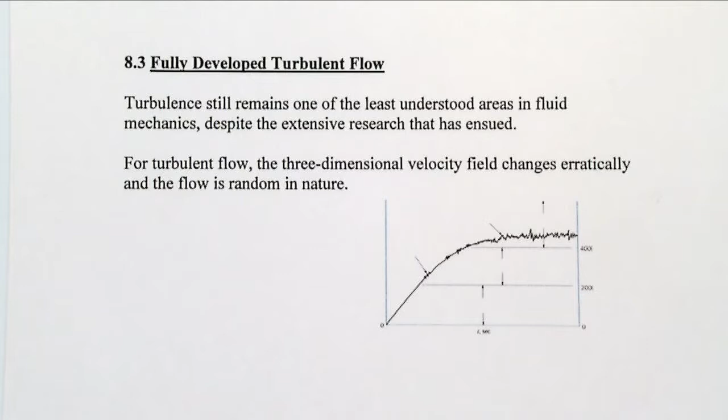We talked about the minor loss, major loss in the fully developed turbulent flow when you have a turbulent flow in the pipe. Turbulence is still a question for science. There are many different papers and books about turbulence, but turbulence by itself is a chaos, and it's not understandable how the flow is going to move because it's random. But if you take an average, or somehow theoretically solve that, there is still no exact solution for turbulent flow. This is still the least understood area in fluid mechanics, especially in the pipe.

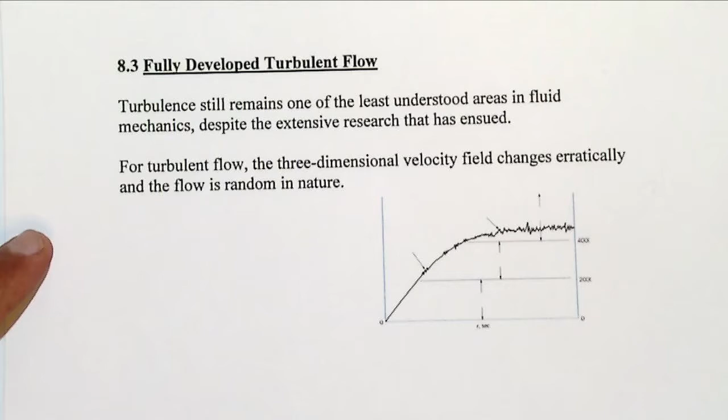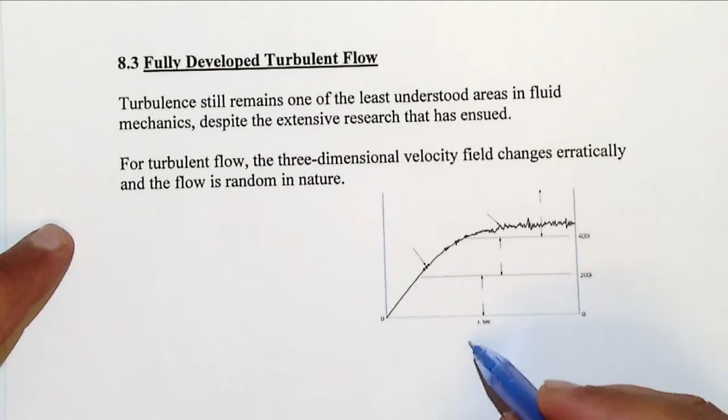So we talk about the critical Reynolds number: after 2000 or 2100, you will have a transition that starts a transitional period, and then you have fully turbulent flow. If you plot time in seconds here, and Reynolds number here, at 2000, 4000, and here is your velocity profile in the pipe. At first, when the Reynolds number is less than 2000, you have laminar flow.

After that you have a transitional period, and after that you have fully developed turbulent flow. These are the velocity profiles, and you see you have a noisy profile. That's because the velocity is not smooth, and the velocity is going to change.

But there are some advantages and disadvantages with turbulent flow. At first, you have to know that if the velocity is in the laminar part, it's one dimensional, so you only have u in the x direction, as we talked about in the previous class. In laminar flow you have that velocity, but after that you have some wakes or something like vortex. So it has to be known that you have a u velocity, but at the same time you have v and w, so it's going to be random motion.

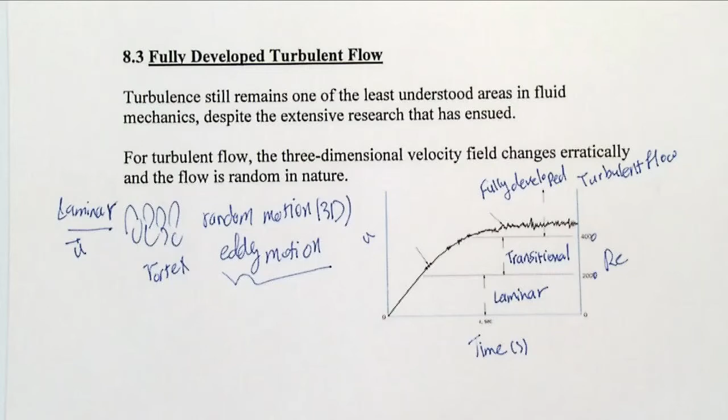So what will happen when you have a vortex or eddy motion? One of the main things that happens is the mixing is going to be high, so the flow layers are going to be mixed with each other. So if you put one particle of the fluid and track it, it's going to have a chaotic or random movement from layer to layer. It's not going to be smooth like laminar flow.

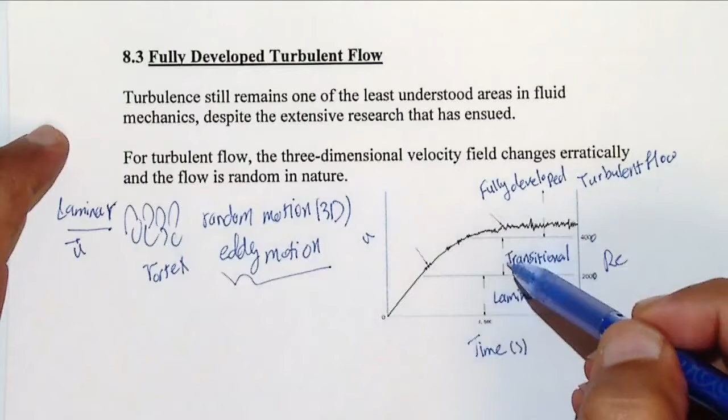And since you have a vortex, the size of the vortex or wakes at first is going to be high, like in the transitional stage, and then after that you will have very small noises because the size of the vortex or eddies is going to be smaller and smaller. It's going to be a very small size of vortex that finally dissipates your energy.

So it's another source of loss of energy in the pipe. In laminar flow you have a viscous effect, and you find out what is the loss. But here in turbulent flow, you have another loss because of the turbulence. That's the difference: in turbulence, by the layers affecting each other with random motion and vortex, you will have a dissipation of energy because of the turbulence.

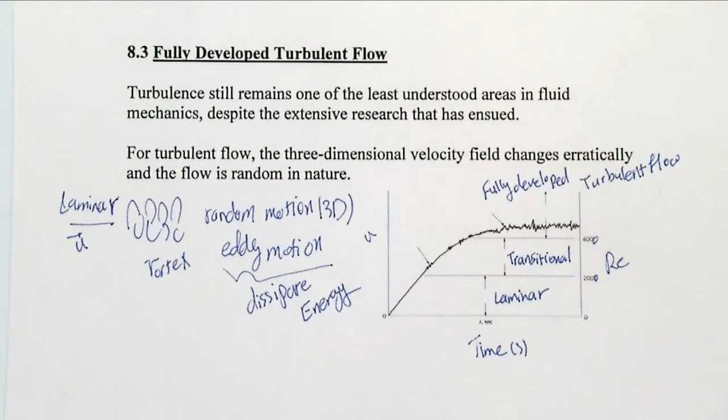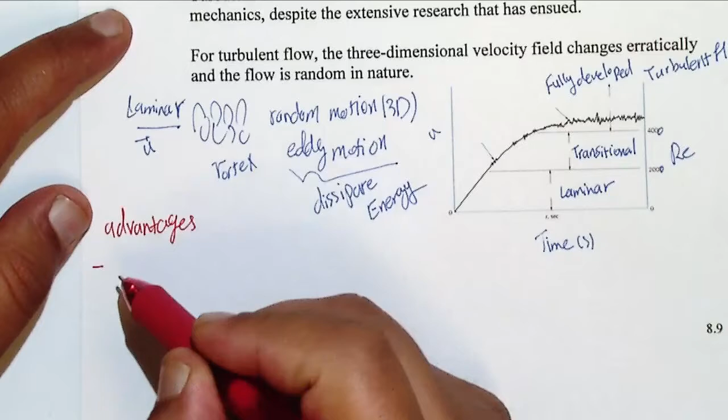So if I write it down just for your information, turbulence is not always bad. It has advantages and disadvantages. So, advantages: it could be enhanced mixing. Sometimes you need to mix, that's why when you mix your coffee with cream, you need to make a vortex there, and chaos, also turbulent flow, because that's going to increase your mixing. By itself, laminar movement is smooth, and mixing is very slow.

So enhanced mixing is going to improve your heat transfer. It's not always bad, but it has disadvantages as well.

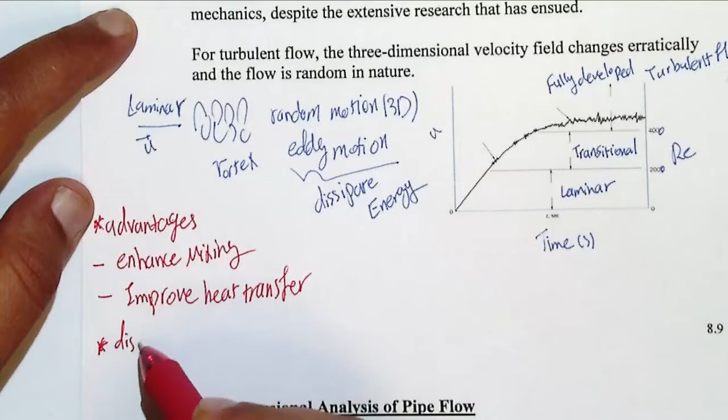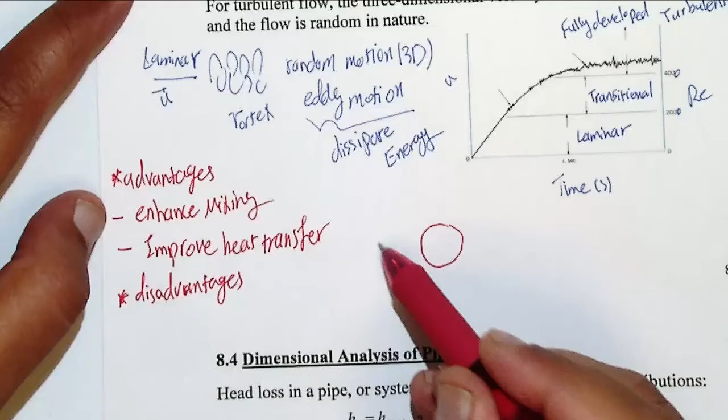Disadvantages: it could be the drag force. So for example, you have a ball and the flow comes in and goes over it, and here you have a wake. Because of the wake behind that, there is turbulence flow, and the drag over that is going to be increased.

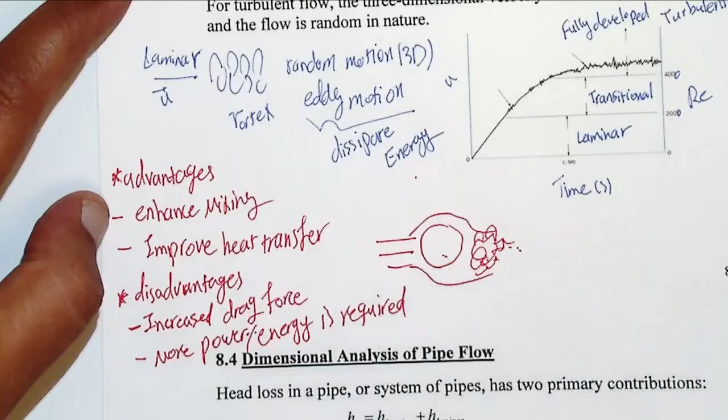So increasing the drag is a bad thing that you have to know about turbulent flow. What else? The amount of energy required also increases. Why? Because you have dissipation of energy, right? More power or energy is required.

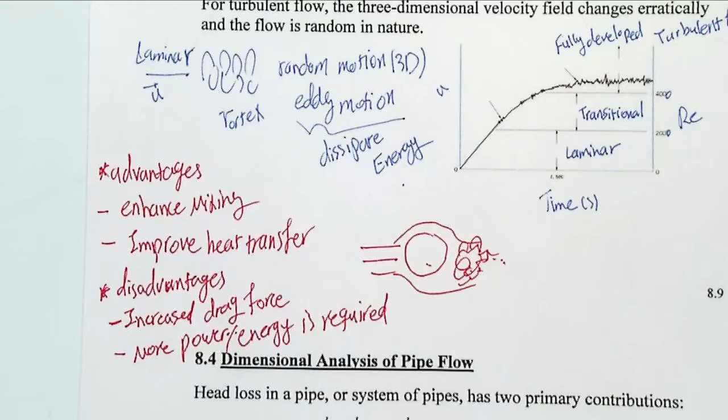These are the advantages and disadvantages in turbulent flow, and you have to know that mixing and improving heat transfer happen because of eddy motion. Increasing the drag by itself is just based on experiment, because of the wakes that we have, and also power and energy because you have dissipation of energy.

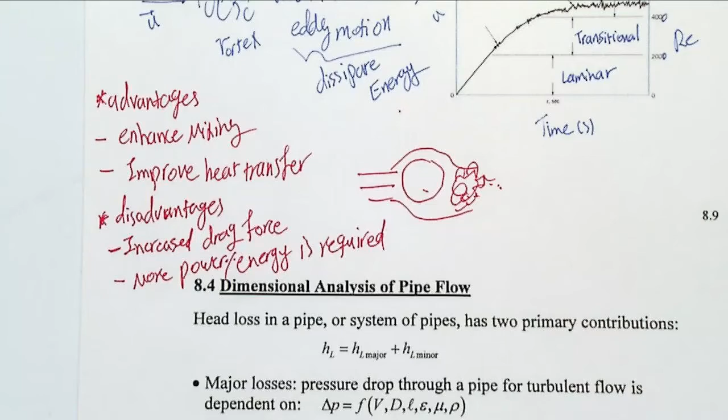Okay, what we are going to do here is find head loss in this pipe. So for now you had another equation, 64 over Reynolds for friction factor, that we talked about in the previous class, and it was the friction factor we found, times L over D, V squared over 2G. That would be your loss here, and if that's laminar, it's going to be 64 over Reynolds. So you did that and found it for laminar flow.

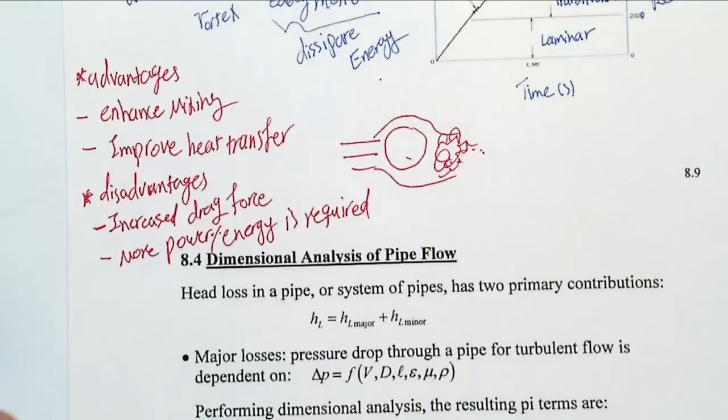But now it's turbulent flow, so you cannot use that equation because that's for laminar, and now we have turbulent flow. So at first we make changes in the head loss and make it two terms, which are the major and minor losses.

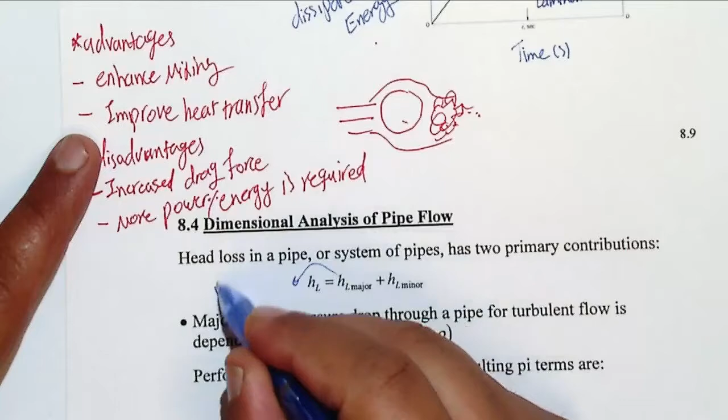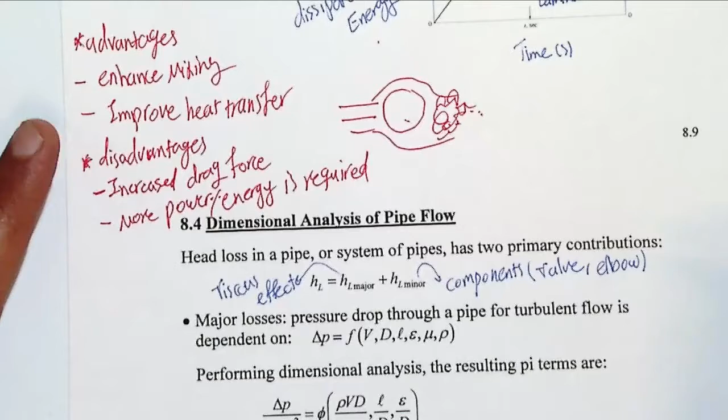We separate those because major loss is because of a viscous effect; that's the major loss. Minor loss is because of components, configuration, and also the direction. So it means that if you have any valve or any elbow, if that's not a straight pipe, then you will have a minor loss because of those, right? So you have a major loss that is viscous effect.

Again, this viscous effect is not the same as the viscous effect you have in laminar flow. You will have a different viscous effect here, but it's the same as the definition you have in laminar flow. So it's going to be the major loss that is for straight pipe.

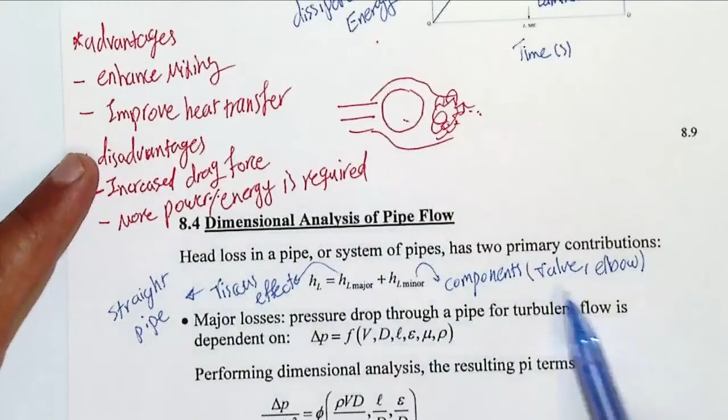But if you have anything like a valve or elbow or anything that additionally decreases your energy or loses your energy, this is going to be another term that is going to be calculated.

Okay, so we did that dimensional analysis in laminar flow. If you check the notes and the previous video, we wrote down the parameters that delta P, or pressure drop, is dependent on. This was velocity, the diameter, the length, and also mu.

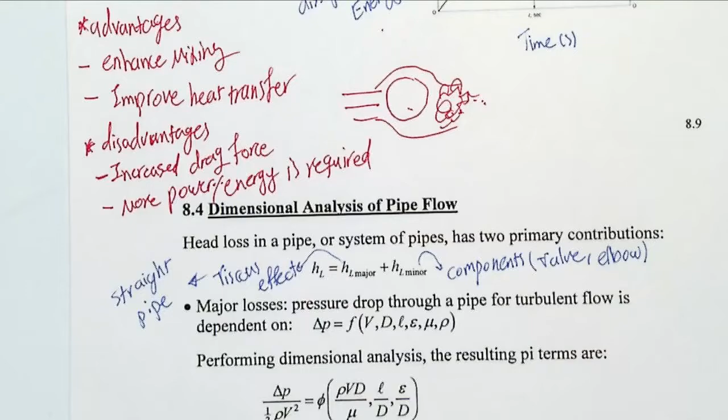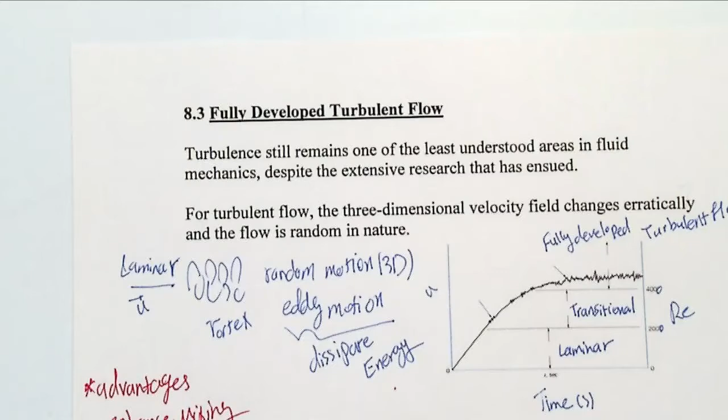But the difference is that in turbulence, two additional terms should be added. In turbulent flow, the density... because you have eddy motion, you have inertia or the mass of the fluid, and density is another parameter that contributes to the loss and energy loss or pressure drop that you have.

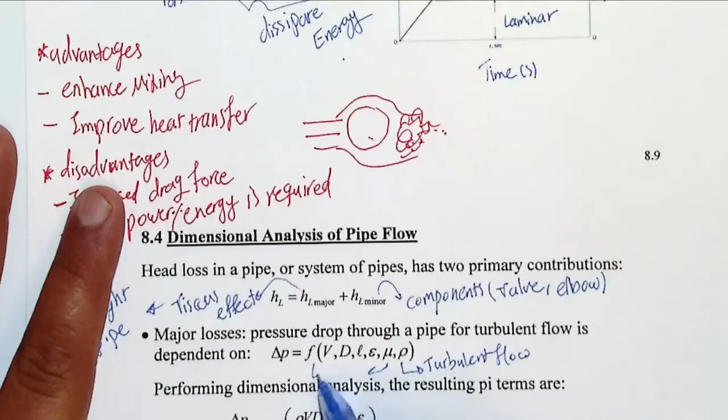So we have added two additional parameters here. One is rho, because of the turbulent flow, but mu was there before because of laminar flow. So the difference is that epsilon and rho are two additional parameters that delta P, or pressure drop, is dependent on.

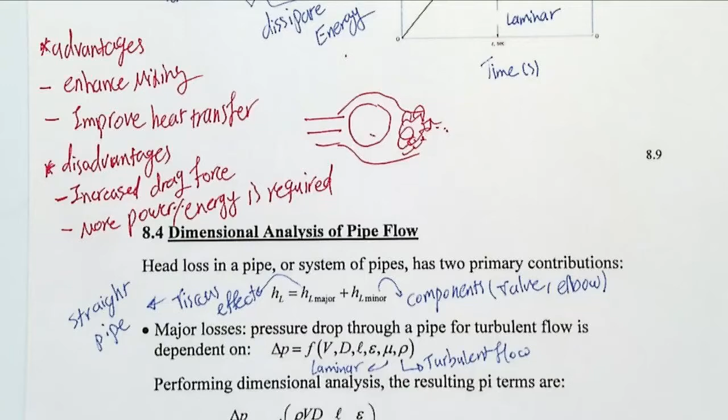So if you write it as tau, because you are talking about major loss, right? Tau is not just minus mu du over dy - that was for laminar. Here in turbulent flow, you have tau, which is tau laminar, plus another tau, which is for turbulent.

It means you have the same major loss that you have for laminar flow, but additionally, because of the chaos that you have, laminar plus another additional tau between the layers is also part of the pressure drop.

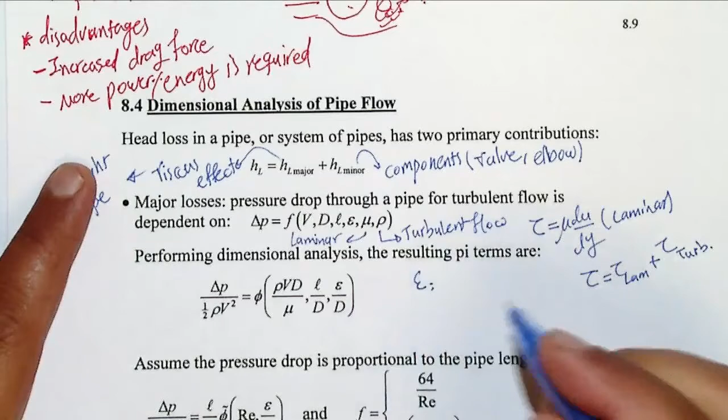So we'll list the parameters as V, d, mu, and L that we had before - 5 parameters. Additionally, 2 parameters, which are epsilon and rho. Rho is density, which in turbulence affects the pressure drop, and epsilon is roughness. So that means the roughness of the pipe is playing a role.

It is not negligible. For laminar flow, when the flow was laminar, it stuck to the wall of the pipe, and the roughness or smoothness of the pipe doesn't change the pressure drop that much. But in turbulence, the flow is dependent on how much roughness you have, because if you have high roughness, or low smoothness, then the flow is going to be much more turbulent than in a pipe with a very smooth shape, right?

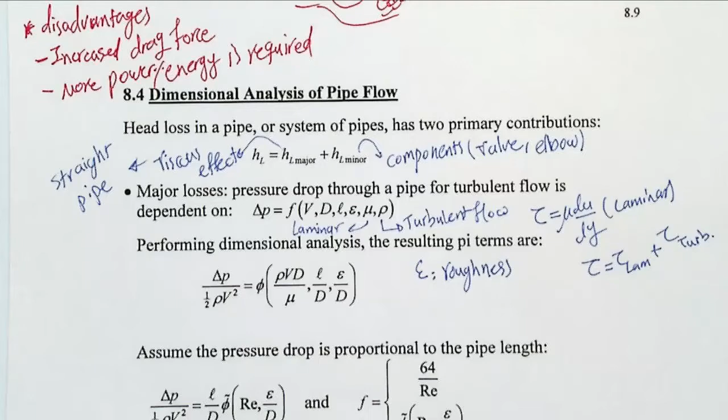So these parameters are also going to come into play. If you do the dimensional analysis and find the pi terms, now you don't have 2 pi terms. Before you had 2 pi terms because you had 5 total variables minus 3 for the MLT units. Here you have 7 parameters listed, so minus 3 gives you 4 pi groups.

If you do the dimensional analysis, you'll find that one of those is going to be Reynolds number, like before. Another one is L over D, same as for laminar flow. And here also delta P over 1 over 2 rho V squared, which is the non-dimensional pressure drop, again the same as before.

But here, because of 2 additional terms, we also have Reynolds and epsilon over D. That epsilon over D term is called relative roughness. These 2 terms are added, so in turbulent flow, delta P is not only dependent on L over D.

That was only L over D before, but now 2 additional pi terms are added. So if you assume the pressure drop is linearly proportional along the pipe, you can bring the L over D out. But L over D comes out, and you still have another function you have to find for the turbulent case.

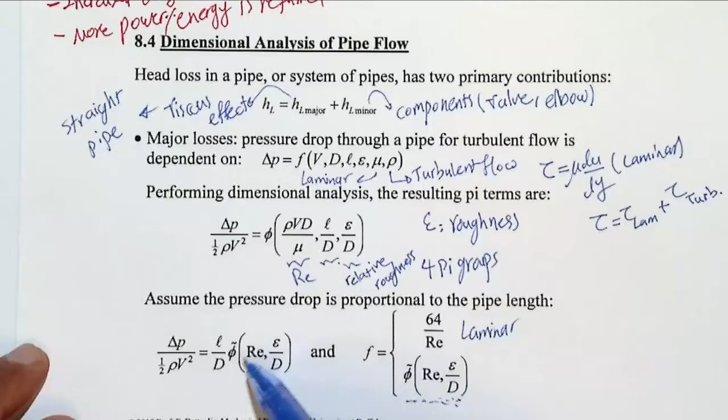But if it was laminar, it was easy to find. For laminar flow, you replace the phi function, which was only a constant, with 64 over Reynolds. Then the equation becomes delta P over 1 over 2 rho V squared equals 64 over Reynolds, which is your F or friction factor, times L over D. That was the equation for laminar flow.

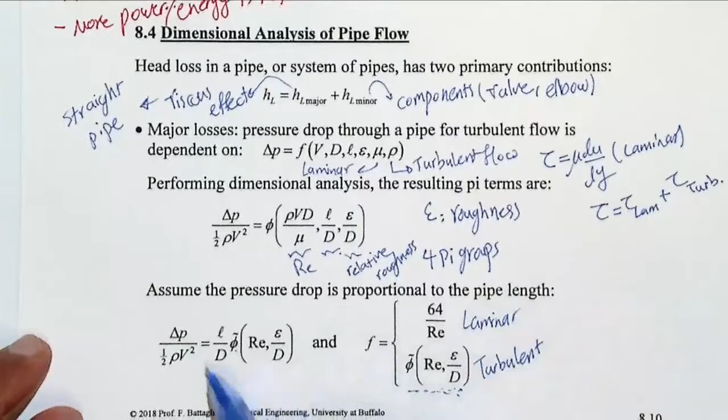But in turbulence, you have to find out what phi is. For turbulent flow, by doing the dimensional analysis, you find that it's the same L over D multiplied by another term, which includes Reynolds number and roughness. So it's not only Reynolds anymore, epsilon is also added.

So you will have it, but you have to know that this function doesn't come from theoretical analysis, because we don't have any answer. As we know, turbulence is not totally understandable, and we don't have any theoretical answer for that.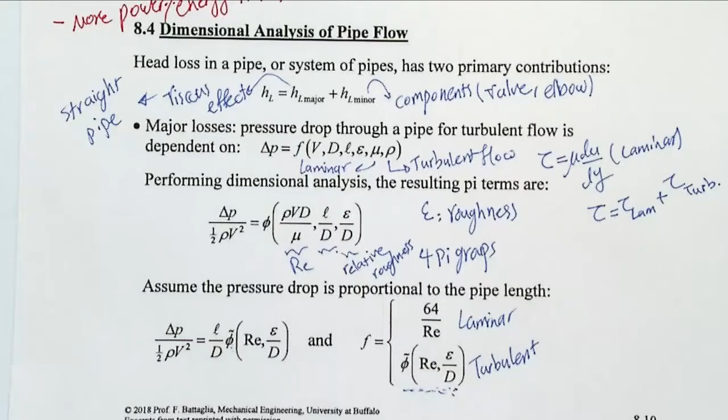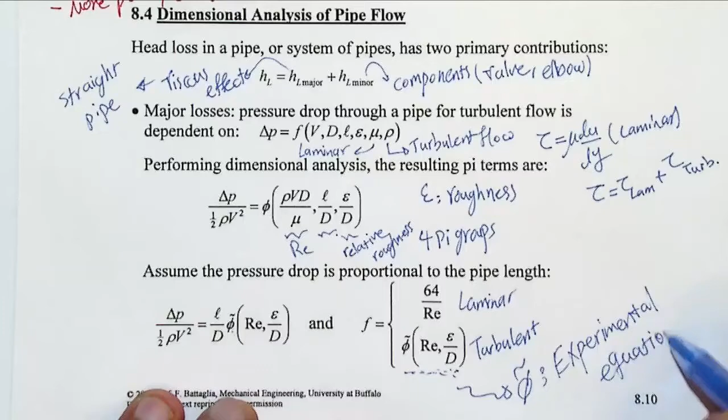So the answer for this phi bar, or phi hat, comes from experiment. It's an experimental equation or function that is given to you, and you have to apply it for turbulence. It depends on the situation, and the Reynolds number will be different, so you'll have different charts to find it out. For now, you have to know this is not theoretically answered, even at a higher level in fluid mechanics, there is no answer except an experimental one.

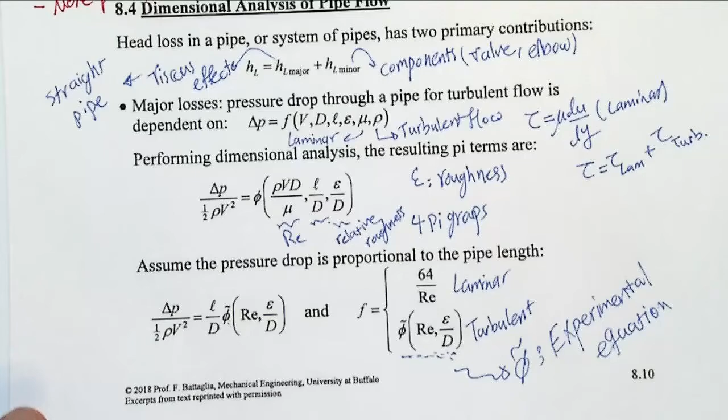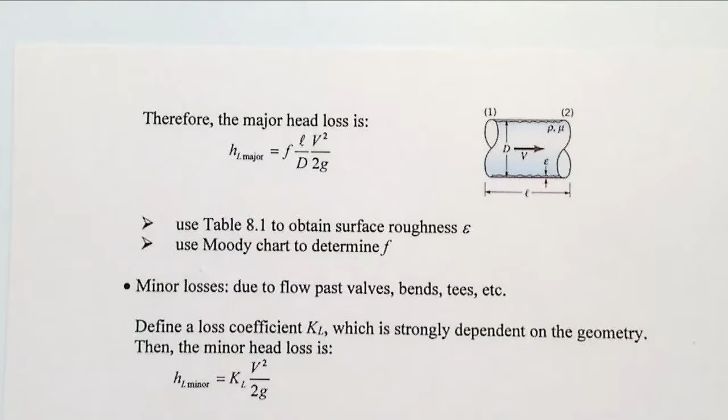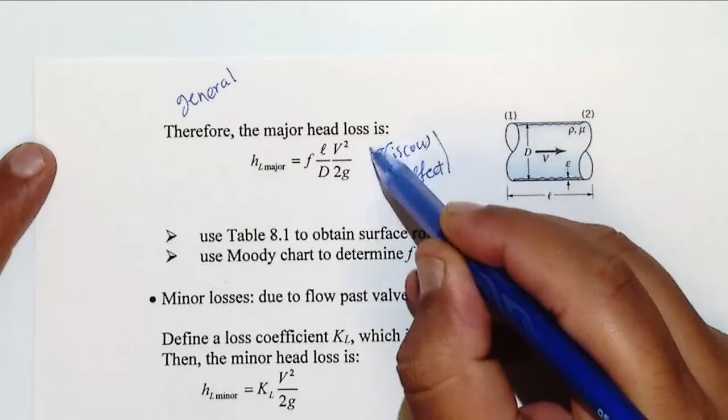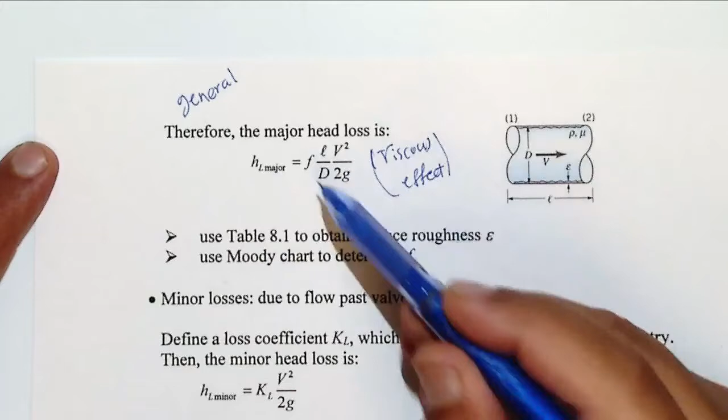So if we bring it here for fully developed flow, that's the general form equation for major pressure loss. In general, you have HL major, which is the major loss due to viscous effect. The equation is F, the friction factor, times L over D, times V squared over 2G. But this F is going to be different for laminar or turbulent flow. So first you have to answer whether, based on the Reynolds number you have, the flow is laminar or turbulent.

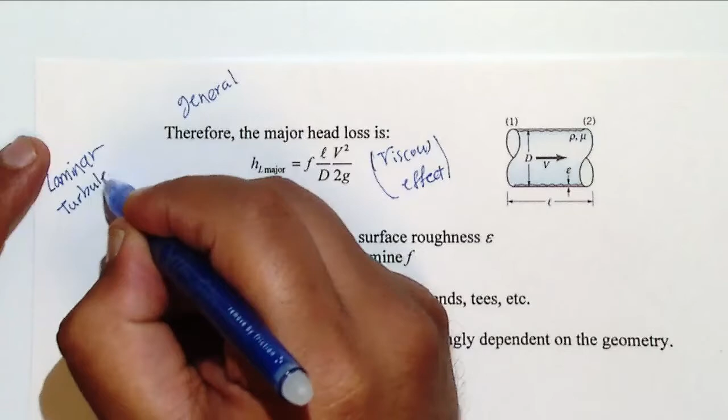If that's laminar, then F is going to be 64 over Reynolds, and if it's turbulent, you have to find out what F is. Where you can find it is going to be found by epsilon. First you have to find out the roughness of the pipe based on the different material that the pipe has, and also use the Moody chart to determine F. The Moody chart accounts for different materials, different Reynolds numbers, and different roughness. It gives you a complex plot that is experimentally obtained, with a fitted function for that.

So these are only readings from the table or from the plots. That's actually given in the question. It's not something you have to theoretically calculate, because you don't have it. It's going to be different in different situations, because that's turbulent. But in laminar flow, you know that it's going to be 64 over Reynolds, right?

So in general, your equation for major loss is going to be F times L over D times V squared over 2G. If an equation is given to you and you apply the energy equation, you have to know that the head loss should be calculated, and that the head loss has two parts. One is minor loss. If it's straight, then the minor loss is going to be zero. It's only major loss.

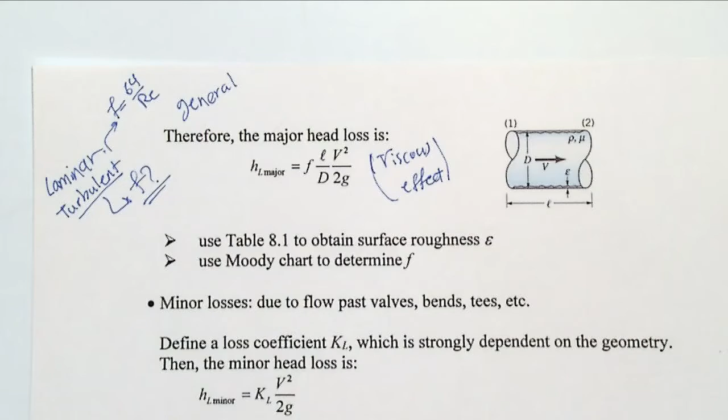If it's not straight, then minor loss should be calculated by another equation we talked about, KL times V squared over 2G. But minor loss is only because of the valve and because of the pipe not being straight, or you have an elbow or any component in the pipe. So that's a totally different thing. But the viscous effect part, that is major loss, depends on whether your flow is laminar or turbulent.

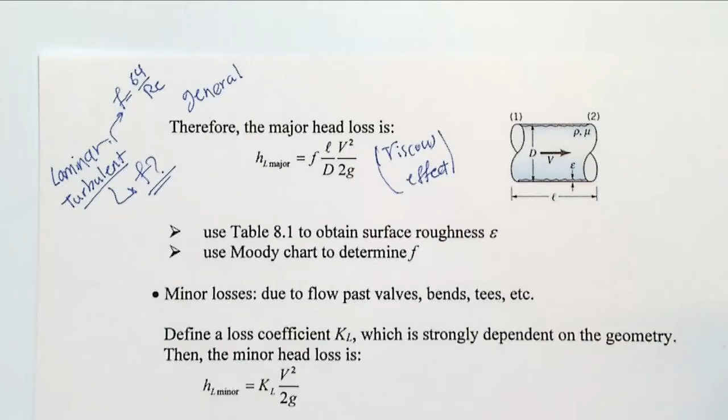If the flow is laminar, the equation is also given: that's 64 over Reynolds times L over D times V squared over 2G. So F, your friction factor, is going to be 64 over Reynolds. But if it's not laminar, then the flow is turbulent. The minor loss is still going to be KL V squared over 2G, because of the valve, bends, or whatever you have in the not-straight pipe. But the viscous effect should also be read from the Moody chart, or it will also be given in any question.

In the final exam for this level, if that's a turbulent flow, I will give you what F would be. No worry about it. The roughness and friction factor F would be given to you if the flow is turbulent, but you have to check whether it is turbulent or laminar. If it's laminar, you have to use 64 over Reynolds, but if turbulent, you can use the constant numbers.

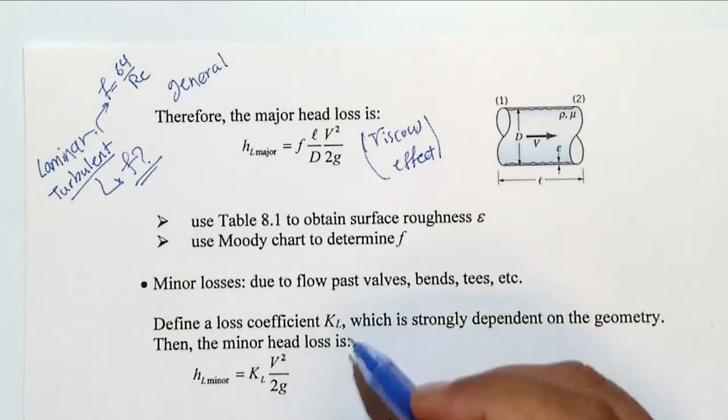That's the thing, but what about the minor losses? Each bend or valve or whatever you have in the pipe by itself adds a loss to the flow and gives you a pressure drop. So any valve, any bend, those should all give you the coefficient, the loss coefficient, or KL. It has to be given, and then you can find what the minor loss is for that.

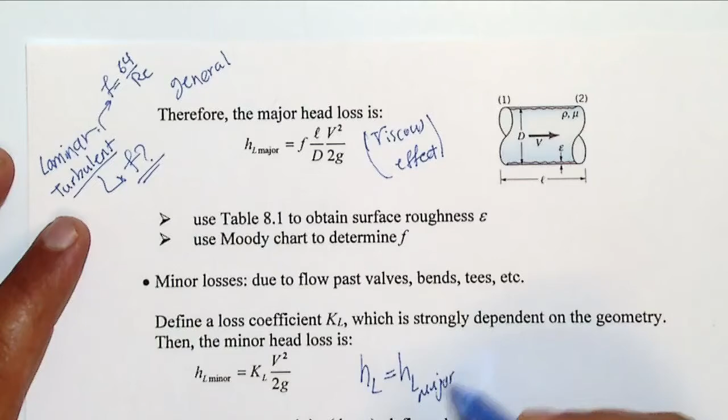So in the energy equation, you have to find that HL equals HL major plus HL minor. If the question tells you that the minor loss is negligible, then you can neglect this part, but maybe KL for different things in the pipe is given. Then you have to say, for the minor loss from the valve, based on the KL it has, and again for the bending, if the KL is provided, plus whatever else you have in the pipe. So in total, these add up to your HL minor, and the major is calculated only for the viscous effect, which again comes back to whether it's laminar or not.

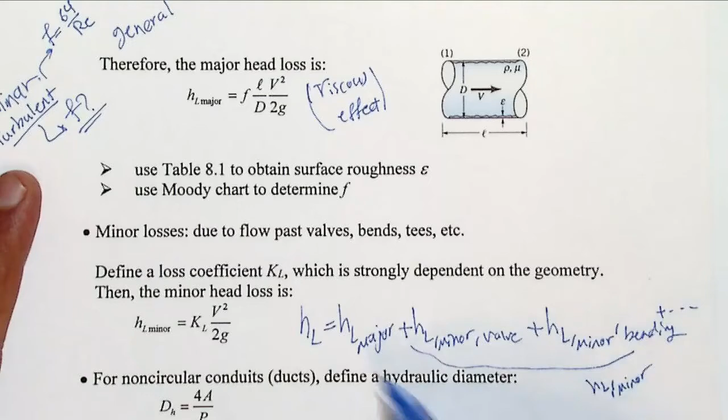What else do we talk about in this chapter? We talk about pipe flow, and in pipe flow, it's all about the round or circular shape pipe. If it's circular, you always use D as a parameter. D is the diameter of the pipe. What is not a diameter of the pipe is actually the characteristic length, or hydraulic diameter, of the pipe.

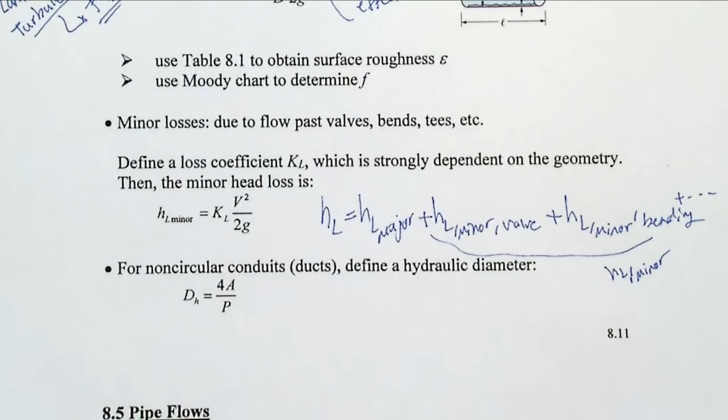If it's a duct or whatever it is, but it's a conduit and it's closed, your wall is closed and the flow passes through it, but it's not a circular shape, maybe it's rectangular or another type of shape, so the flow comes passing through with the velocity.

Whatever equations you find in this chapter are valid also for non-circular ducts, as long as you replace D with DH, the hydraulic diameter. The hydraulic diameter is 4 times the area over the perimeter.

So for non-circular pipes, the hydraulic diameter DH is 4 times the cross-section area over the perimeter of that shape.

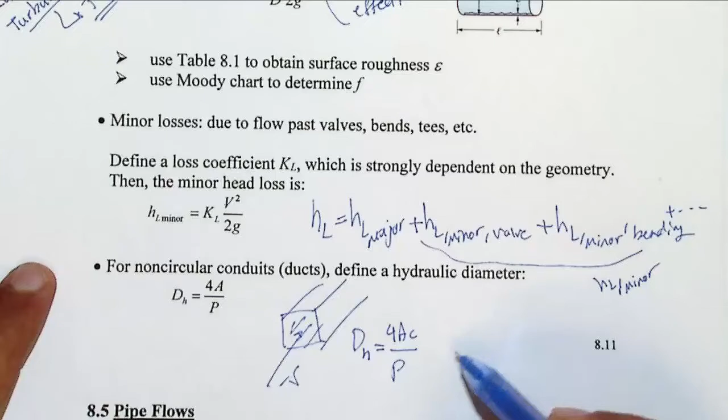For example, if we calculate that for a circular pipe: 4 times AC is pi D squared over 4, over P, which is 2 pi R, and R is D over 2, so the perimeter of a circle is pi D. I'll replace that with pi D. What's left? The 4 cancels out with 4, pi cancels out with pi, and one of the D's cancels out.

So the hydraulic diameter is why we only have D, or diameter of the pipe, in all the equations, because the hydraulic diameter for a circular pipe is simply the diameter of the pipe.

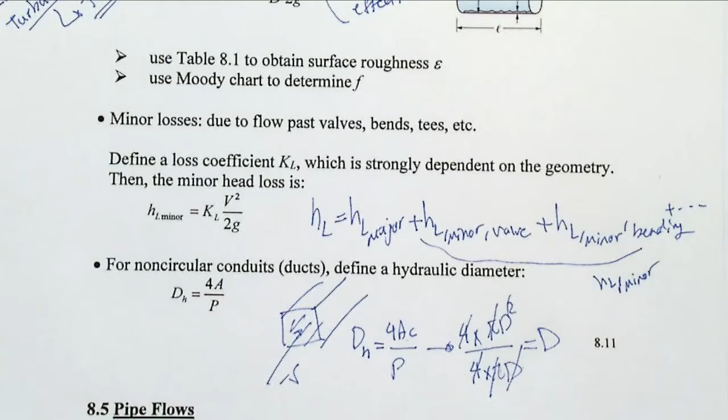But if it's not a pipe, it's a duct, you can replace all the D's in the equations with DH, the hydraulic diameter for non-circular shapes. That's the only update needed whenever you don't have a circular pipe or duct flow. Now, what else do you need to know about this chapter for solving any question?

That you have multiple pipes. If you have a single pipe, then you have a pressure drop because it's a single pipe—meaning from input to output nothing changes physically, like the diameter. The fluid is the same fluid passing through, but the diameter stays the same.

When the diameter changes or Q changes, then the velocity changes, Q changes, and the diameter changes too. All of these parameters affect the pressure drop, so you cannot assume it's only a single pipe and just check input and output, applying conservation of energy or HL major or HL minor for each. This is different because you have multiple pipes, or a system of pipes.

For example, if you have three pipes with different diameters—diameter 1, diameter 2, and diameter 3—connected to each other, the diameter changes here. So it's pipe 1, pipe 2, and pipe 3.

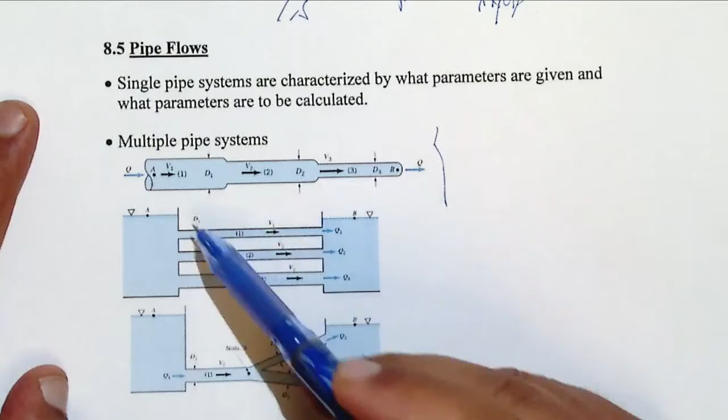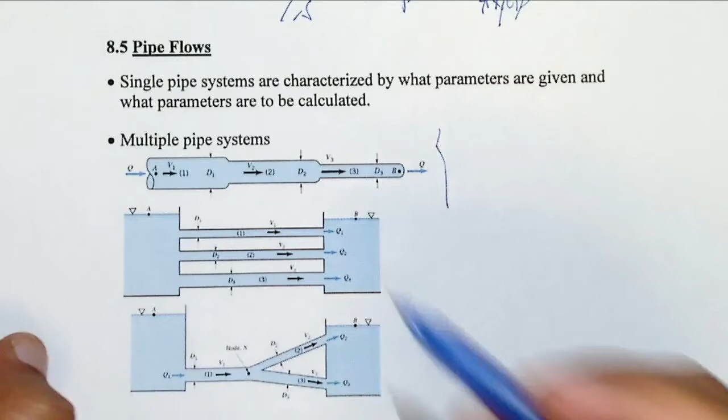In this type, the Q that passes over this pipe, because of conservation of mass, is going to be the same Q that passes over the next and the one after. This is similar to electrical engineering with three wires of different resistance—you have the same current or amount of flux of electricity passing through, but you get different temperature because of the friction. This is the same here: Q is still the same because of conservation of mass or conservation of energy, similar to electrical engineering. So Q1 equals Q2 equals Q3, equals Q total.

But what about the losses? The head loss from A to B is equal to the loss in part 1, plus the loss in part 2, plus the loss in part 3. You have to sum up these losses—it's not just one of them. So you have a loss for the first part of the pipe, then the second part also applies its loss, and the third part applies its own loss too.

So in the next video, in the example question, I will solve a problem for you using a syringe that has two different pipes—not a single pipe, but two pipes connected to each other with different diameters. Then we will find out the loss or head loss for part 1 and part 2, the two pipes.

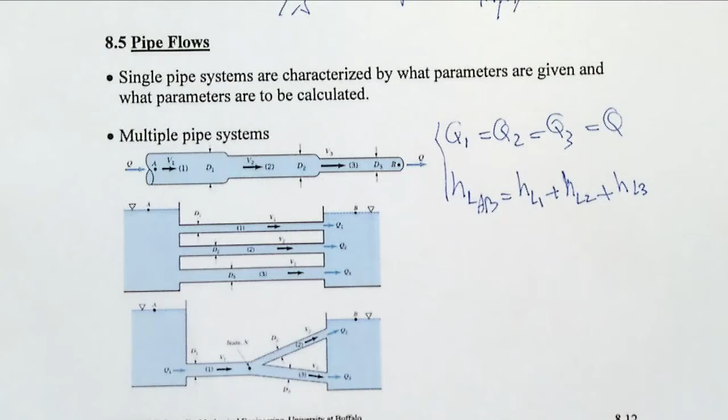If you have this system of pipes, you can see the flow has Q1, Q2, Q3—different pipes with different diameters. In this case, the Q total that passes over this system is Q1 plus Q2 plus Q3.

Okay, so this is going to be 3 velocities, 3 diameters, and Q1 could be different from Q2 and Q3, but the summation of all has to equal your total Q. What about the losses? If you have these 3, the flow that comes here to here should be the same situation, because that's a steady state and the flow has the same situation, same velocity or direction, because that's at rest. The flow is the same condition here. So the loss that you have in the first pipe should be the same as the second pipe and should be the same as the third pipe.

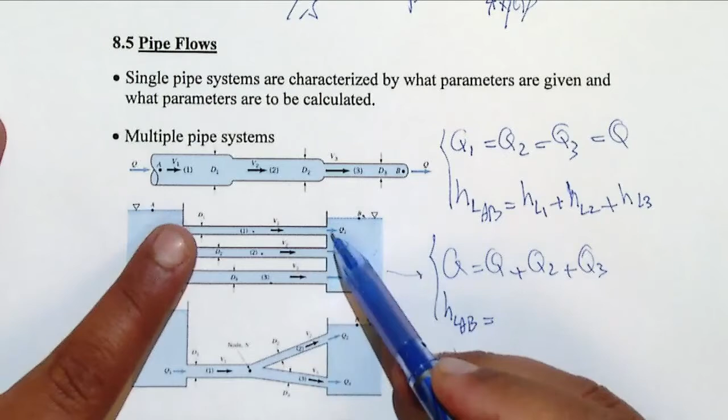That's why from A to B, this is like energy. So energy from A to B, the difference is the same, right? The head loss is going to be the same. It doesn't matter if the flow passes over part 1, part 2, or part 3, it should have the same loss.

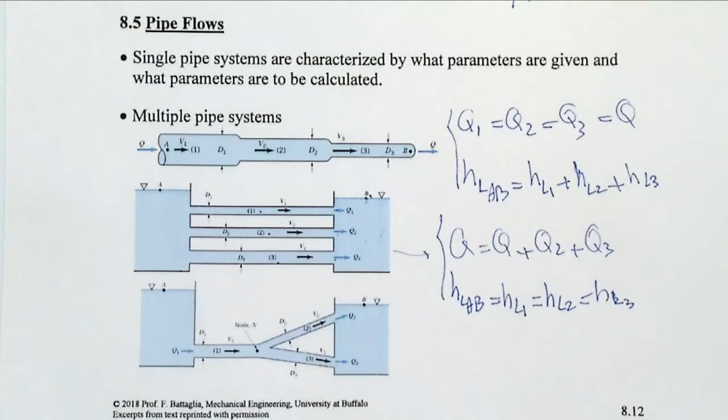Head loss in part 1 is equal to part 2 and equal to part 3. Okay, again, this is for different multiple pipes. For each pipe, you have to use the equation we provided for a single pipe. We're only talking here about how you can solve complex shapes of pipes when you have different shapes, and how you can use the equations and bring them all together to have a more general form.

Here's another question. So you can see from here, A to point N, that is your node, you have a single pipe. Q1 is going to split into two parts. First you have to know that Q1 is equal to Q2 plus Q3, because it's coming here and at this point it's going to split. That's why Q2 plus Q3 equals Q1.

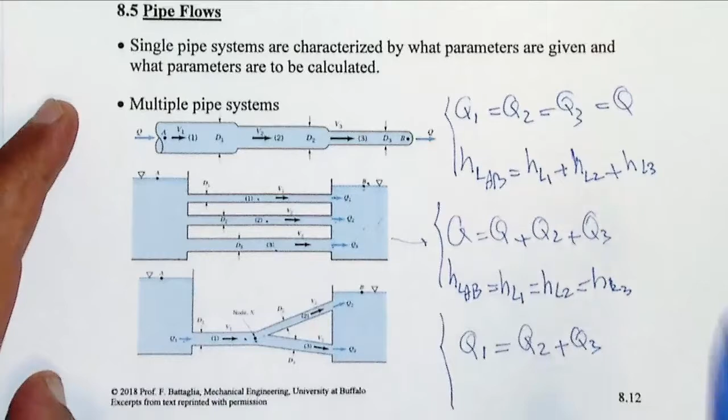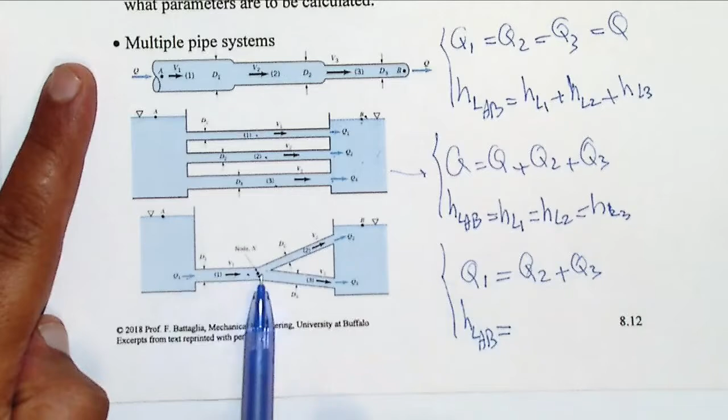What about the losses? So the total loss from A to B is equal to... first, this is going to be like in a row, so the first two pipes with different sizes. So it's going to be HL1.

So from here to reach the node, and then to reach B you can come from this side or this side. Which side you choose doesn't matter, but one of those is enough to find HL2. So HL2 or HL3 could be used, but only one of these two is enough, because you are moving from point A to point B. From point A to here you don't have any loss. From point 1 to point N, which is your node, you have HL1, and you have Q1 that splits into 2 and 3.

You have two lines after that, but whichever way you use to do the analysis, from here to B, or from here to here and then to B, it doesn't matter, because from here to here you don't have any loss. So the head loss from A to B is going to be HL1 plus one of these two, not both of them. Only one of these two is enough for you to solve and find the head loss in this type of question.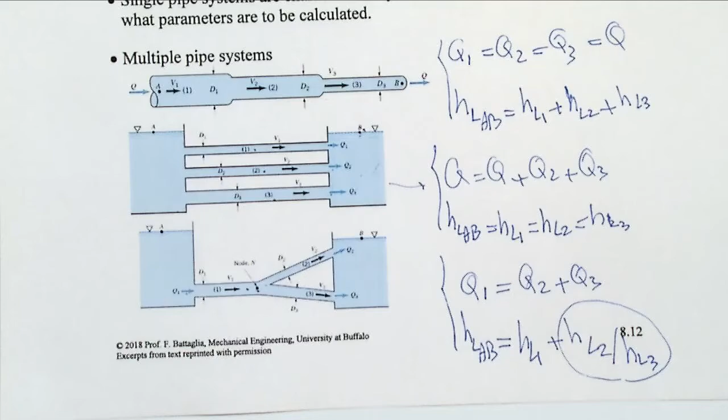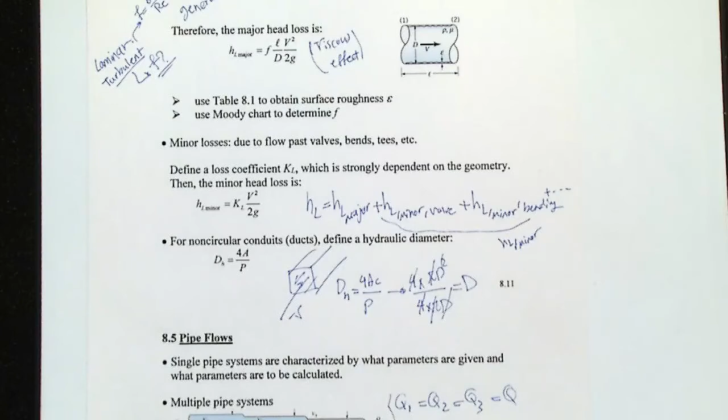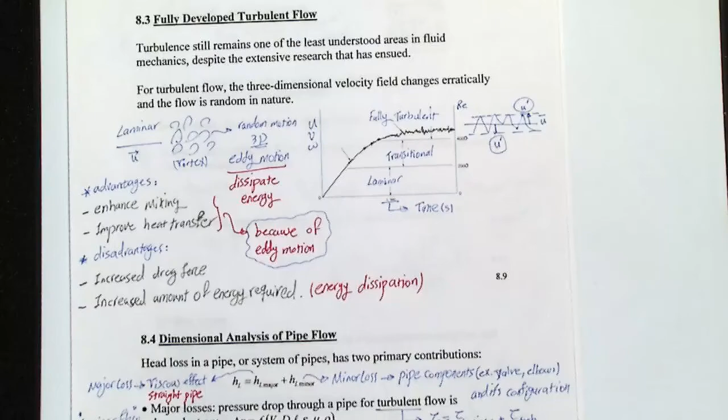So what we did here to finalize the chapter: we found that turbulence itself has a different meaning and also a different type of equation. First we summarized what is the meaning of turbulent flow and what is fully developed turbulent flow, what advantages and disadvantages we have, and how the flow moves from laminar and transitional to when it's fully turbulent. Then we found that in fully turbulent flow, the pressure drop is different than laminar flow.

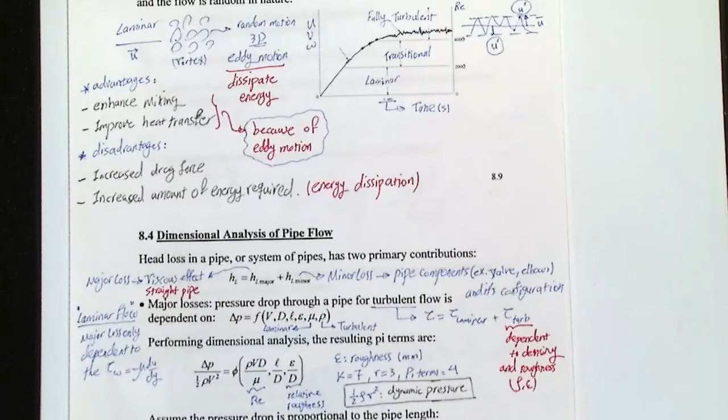So we did the dimensional analysis the same way we did before, but with two additional parameters that the experiment shows should be added for turbulent flow. What were those? There were rho, density, and also epsilon, which is the roughness. These two were added to our dimensional analysis, and we found that delta P is dependent on 4 non-dimensional groups, where 2 of those were from laminar flow, but Reynolds number and epsilon over D are additional.

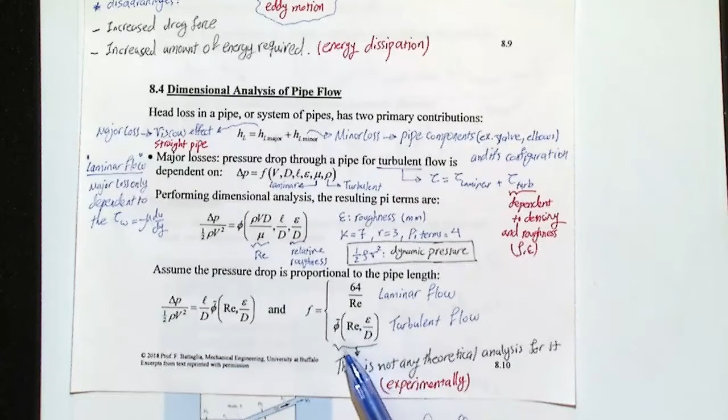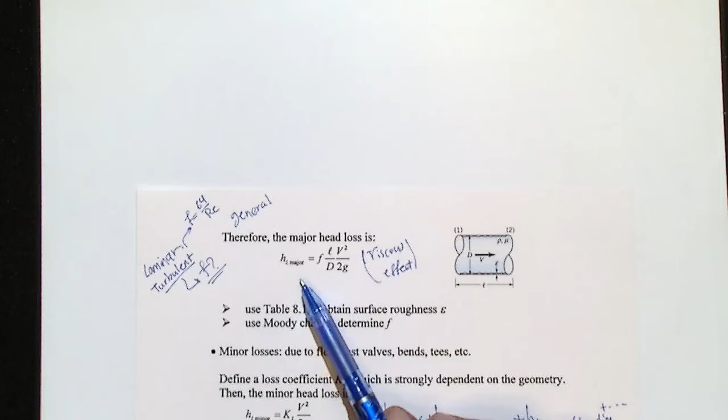So we split these two and summarized that this is going to be your friction factor. In laminar flow, F was 64 over Reynolds, only Reynolds was there, and we found it out. But here in turbulent flow, you need to experimentally find out what the friction factor is. So we mentioned that in this way, you will have a major loss, that's going to be a viscous effect that's split into different equations depending on whether it's laminar or turbulent.

We found out that in laminar flow you have an equation, but for turbulent flow you don't have one. That means the friction factor has to be given in the question, or you can find it in the Moody chart or the book, or Google it based on the roughness you have, the density of the fluid, or the Reynolds number that connects all together. What would be the friction factor if the flow is turbulent in that pipe?

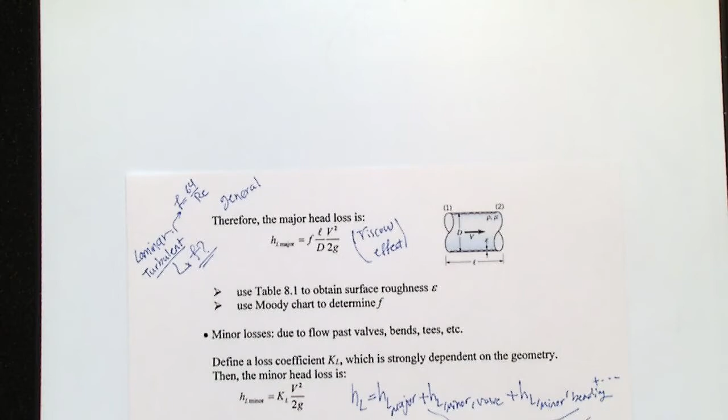After that, we talked about minor losses, which are not related to laminar flow or the flow itself. They depend on the characteristics or components in the pipe or system of pipes. If you have a bend, a valve, or whatever else in the pipe, that may add losses, and the summation of all these is going to be your minor losses.

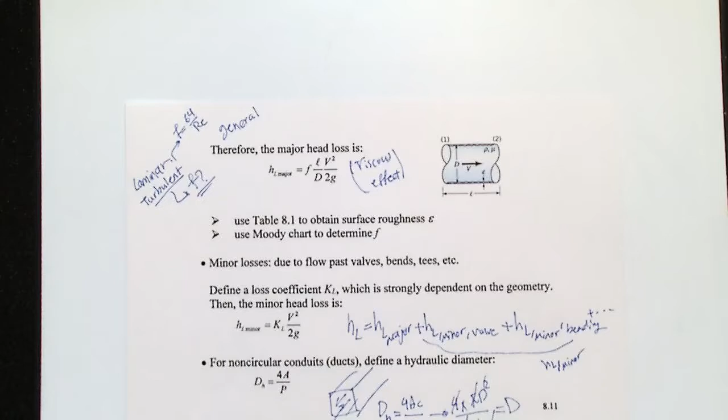The minor losses equation is KL times V squared over 2G. KL is your loss coefficient, and if you multiply by it, it has to be given for the valve or whatever component you have. Then you add the minor losses to the major losses to find the total loss or head loss in the energy equation.

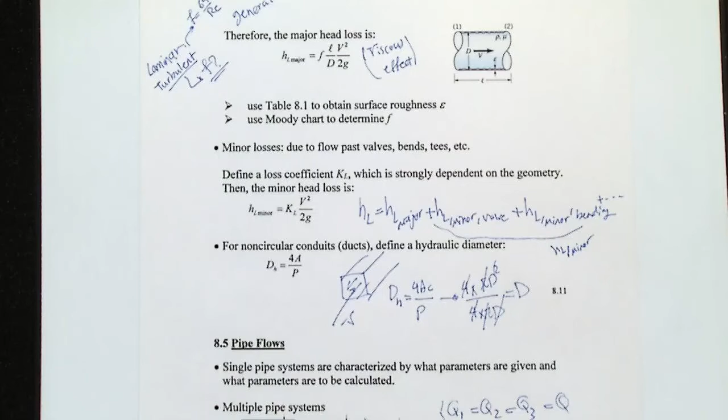We also talked about duct flow, because these equations are not valid only for pipe flow, as long as you replace all the D terms in the equation with the characteristic length. The characteristic length in pipe flow, if it's circular, is D - that's why we use D. But actually this is the characteristic length or hydraulic diameter, calculated by 4A over P, where P is the perimeter of the cross-section area and A is the area.

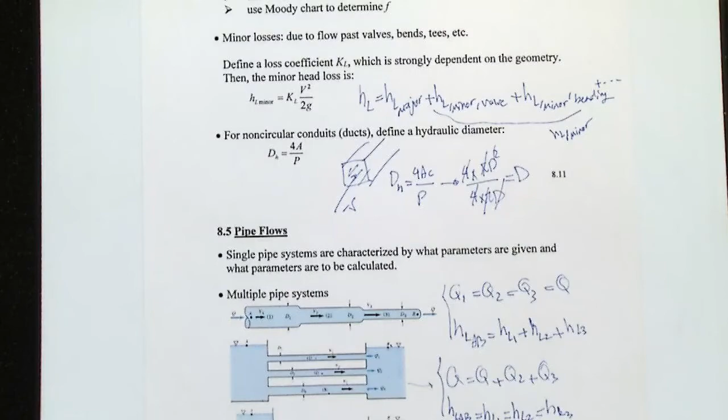Finally, we talked about complex systems of pipes with different sizes and combinations - not a single pipe, but a system of pipes, though any system of pipes is a connection of single pipes. We found that if these pipes are in a row (in series), then the Q's are the same as Q total, but the head loss is the summation of the head loss for each.

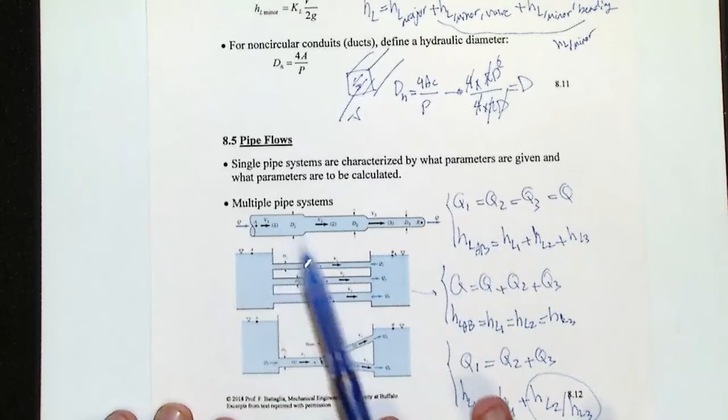In the second case, if the pipes are arranged in parallel, then the Q's are the summation of all Q's, because the flow that passes over this complex system of pipes is split between the three. So Q1 plus Q2 plus Q3 equals Q total that passes over this system.

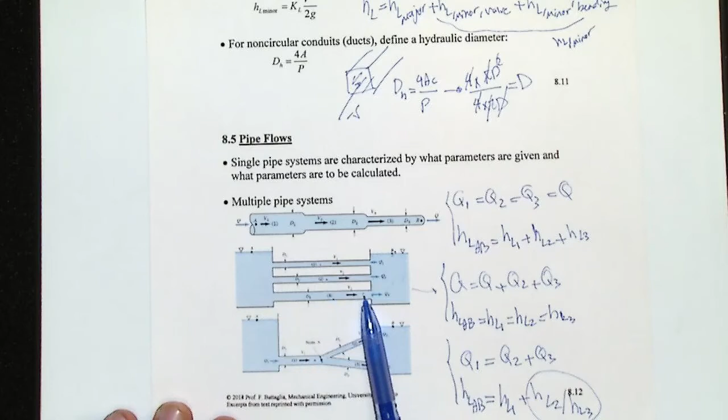But the head loss in each of those is going to be the same. So whatever Q passes over pipe 1, 2, or 3 depends on the loss in each of these three pipes, in a way that finally they all have the same loss. It's going to match itself - that's the nature of fluid mechanics, deciding which side the flow goes and how much fluid passes from each pipe so that finally each has the same head loss.

In general, if you have a combination of all these, you have one part connected to another - two pipes in a row, or it could be the same if you pass over a different line. But we show that Q1 splits, so Q2 plus Q3 equals Q1.

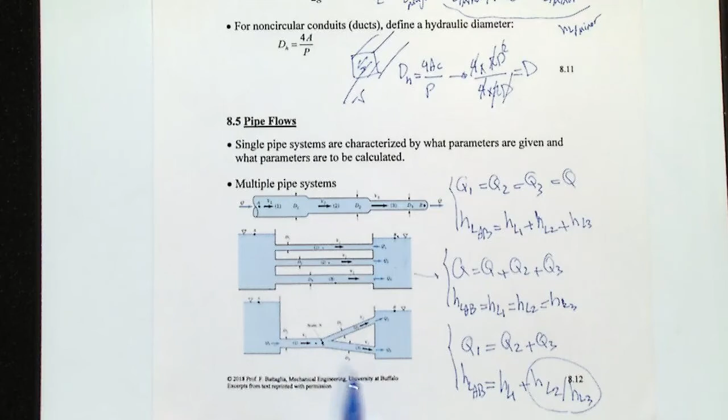Also, for finding the head loss between points A and B, you have to go through one of these two lines, because after point N, at the end of these two, the head loss is going to be the same, because of the things we talked about regarding parallel arrangements.